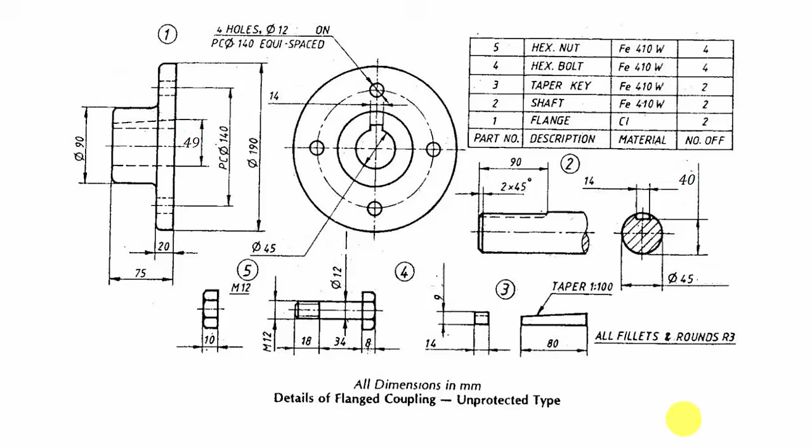In this video I am going to show you how to draw the flange coupling assembly using Solidworks. We have 5 parts: the flange, shaft, the bolt, nut and the key. So first I am going to draw the 5 parts separately, then I am going to assemble it.

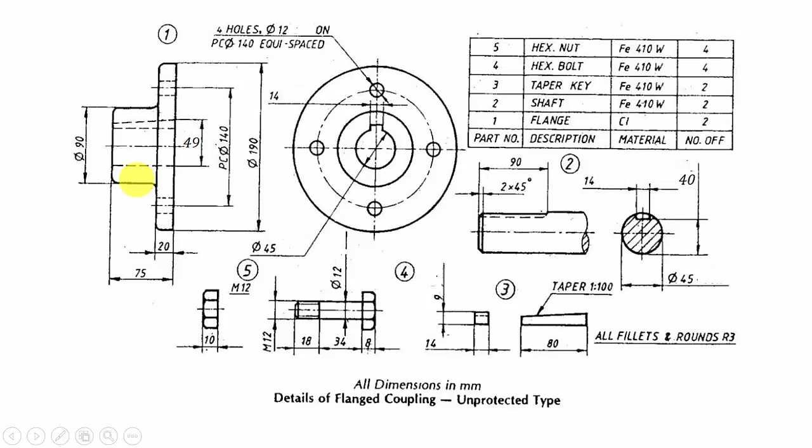First we will start with the flange. I am going to draw a circle and extrude this to a height of 20 mm. Then in that surface I am going to draw another circle of diameter 90 mm and extrude this to a height of 75 minus 20, that is 55 mm.

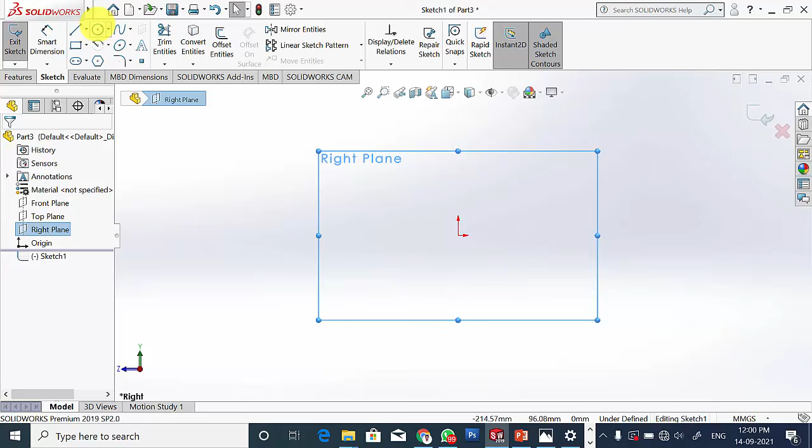First open SolidWorks, click new, click part, select the right plane, click sketch, select circle and draw a circle of diameter 190 mm. Go to features, extrude this to a height of 20 mm.

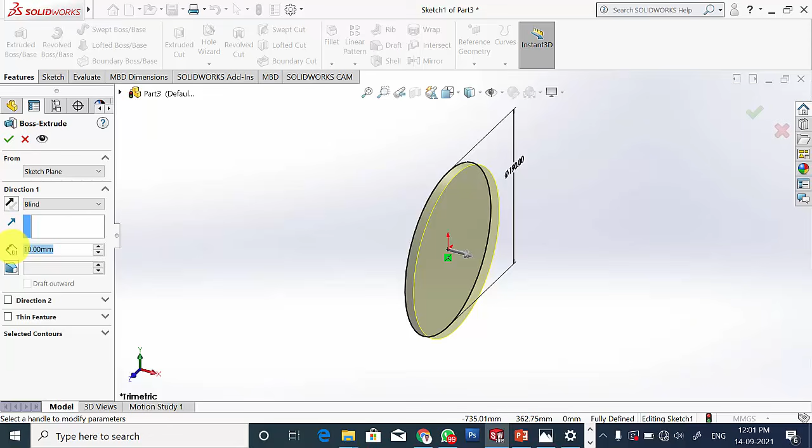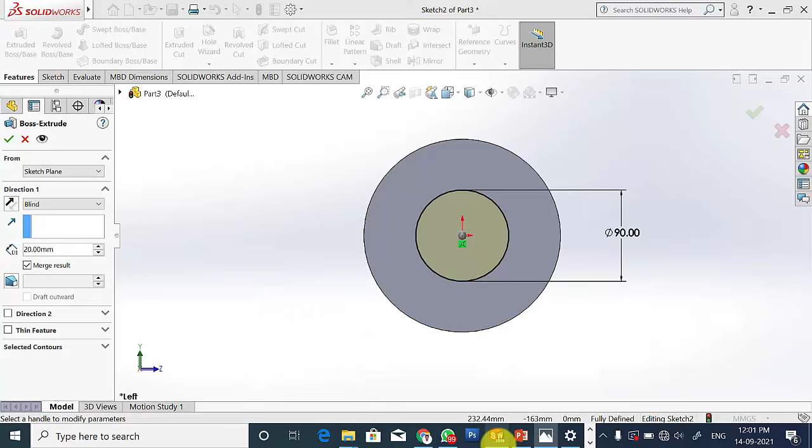Now select this surface, click sketch, click Ctrl 8 to view it in the normal direction and draw a circle of diameter 90 mm. Go to smart dimension and the diameter is 90 mm. Go to feature, extrude this to a height of, the overall height is 75 mm. So it is 75 minus 20, 55. So extrude this to a height of 55 mm.

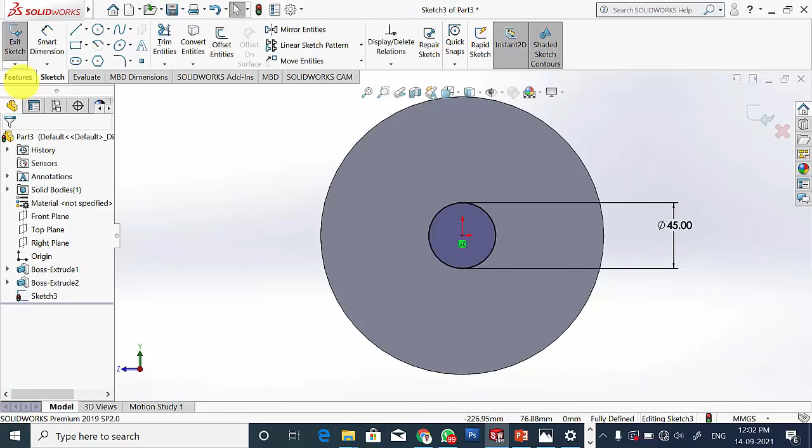In the center we have a hole of diameter 45 mm. Select the surface, click sketch, draw a circle of diameter 45 mm. Go to features, click extrude cut to remove the material. Change the blind to up to surface and select this surface so that the material will be removed up to this surface.

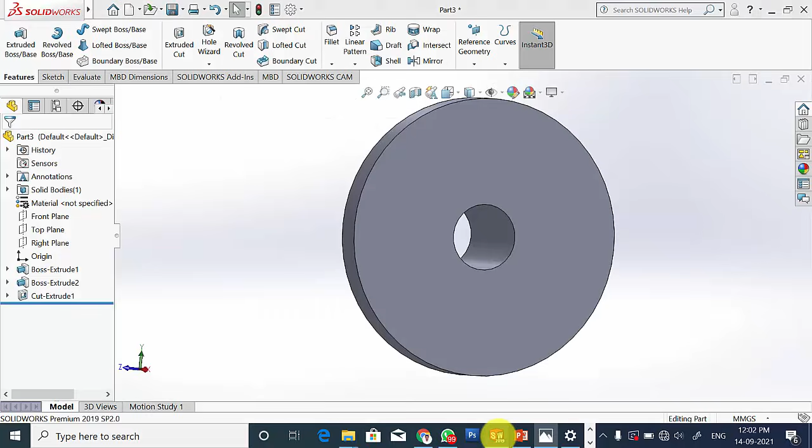Now we have 4 holes at a pitch circle diameter of 140 mm and the hole diameter is 12 mm. Select the surface, click sketch, first draw a circle of 12 mm diameter.

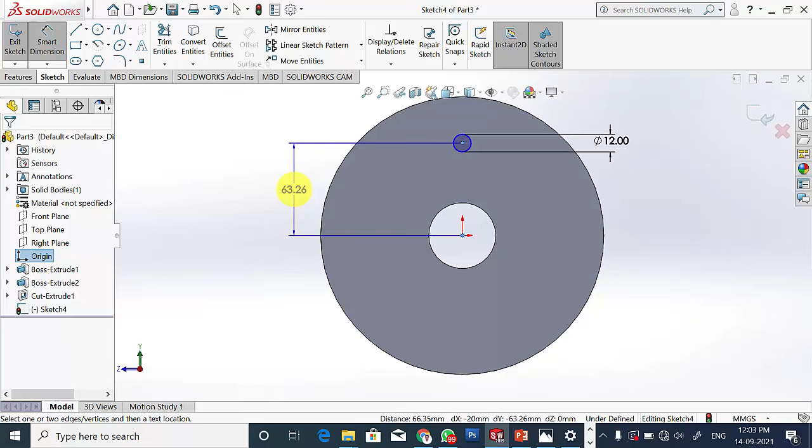So the pitch circle dimension is 140 mm. This distance is actually the radius, so it is 140 divided by 2. So locate this circle in the vertical line. Click Ctrl, click the center point and the origin and locate it in the vertical direction. Now the circle is fully constrained.

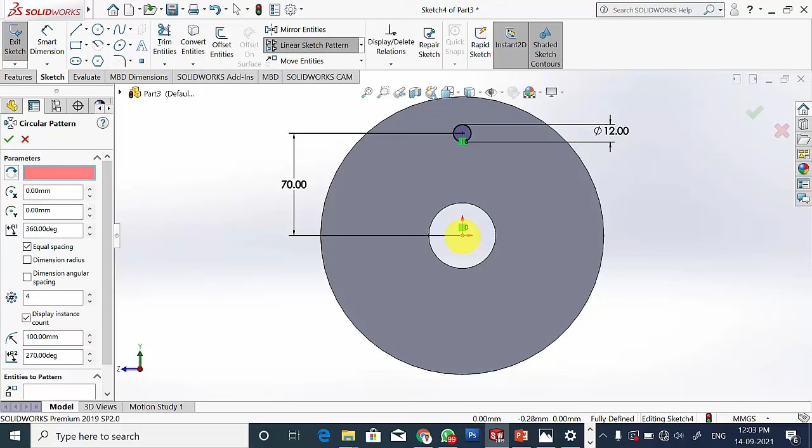Now I am going to pattern this circle. Go to circular sketch pattern. This is the point about which we have to pattern, so click the origin point and in the entities select the circle. So it is automatically 4. Click OK. Now go to feature, extrude cut, change the blind to up to surface and select this surface. Now we have removed the material.

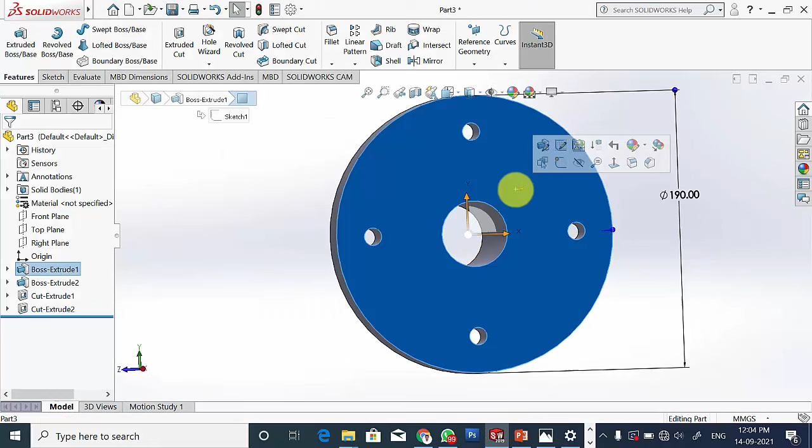Next we have to cut a key slot for an overall height of 49 mm. The diameter is 45, so the key slot height is 49 minus 45, it is 4 mm and the width is 14 mm. Select the surface, click sketch, draw a rectangle of height 4 mm and width 14 mm.

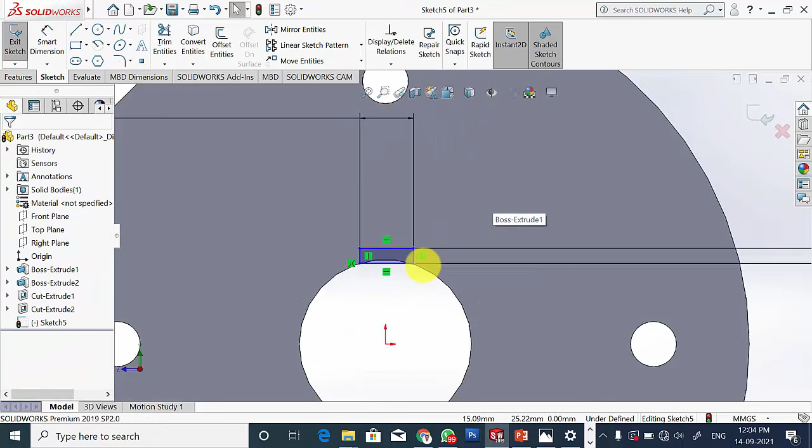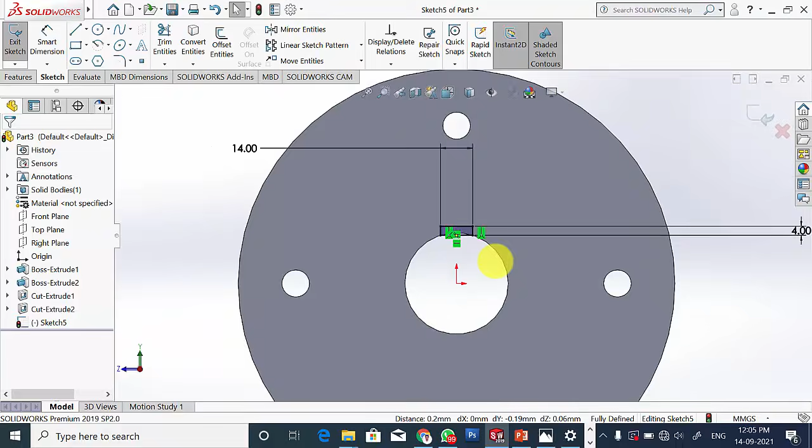This point is coincident with this circumference of the circle, but here it is not coincident. So we have to make this point lie on the circumference. Click Control, click the point and select the circle and make it as coincident. Now the rectangle is fully defined. Go to Features, Extrude Cut, change the blind to up to surface and select this surface. Click OK. Now we have removed the material.

Finally, we have to fillet the edges. All the fillets and rounds are given in a radius of 3 mm, and we have to fillet these 3 regions. Go to fillet and change the radius to 3 mm. Select the edges. Click OK. So now we have completed the flange.

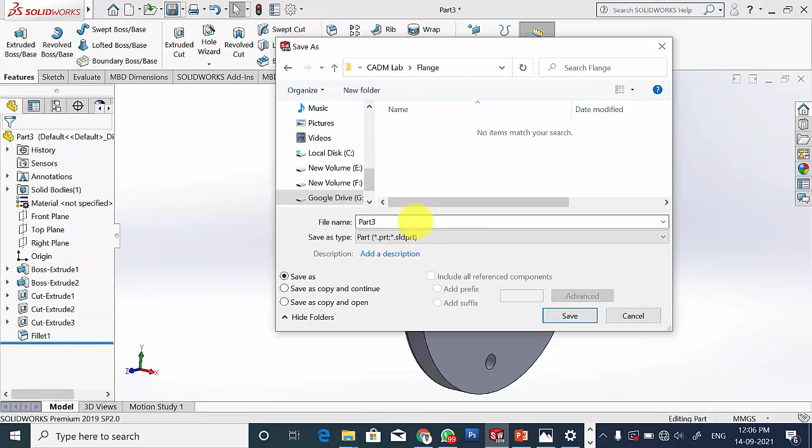Save this. Create a new folder and save it. The name is flange.

Now close this. Next I am going to draw the shaft of diameter 45 mm. Click New Part, select the front plane, draw a circle of diameter 45 mm. Here it is hatched, which means that the extrude length is not given. So roughly I am going to extrude this to a distance of 100 mm.

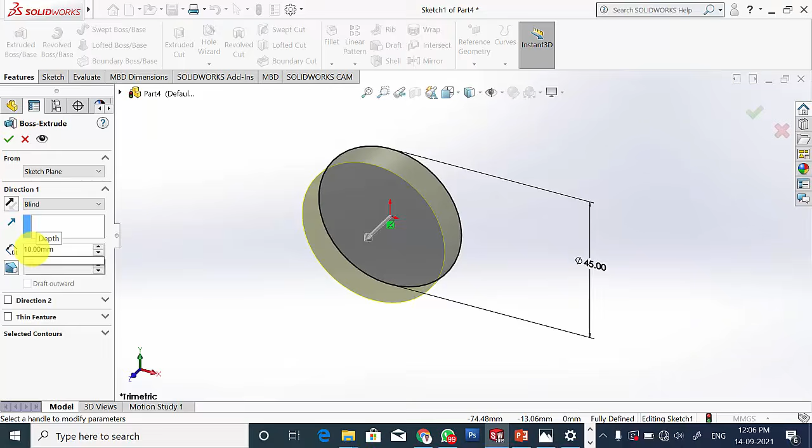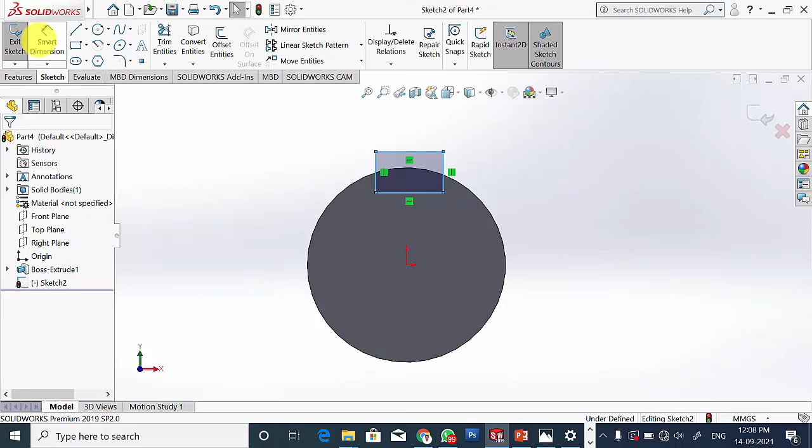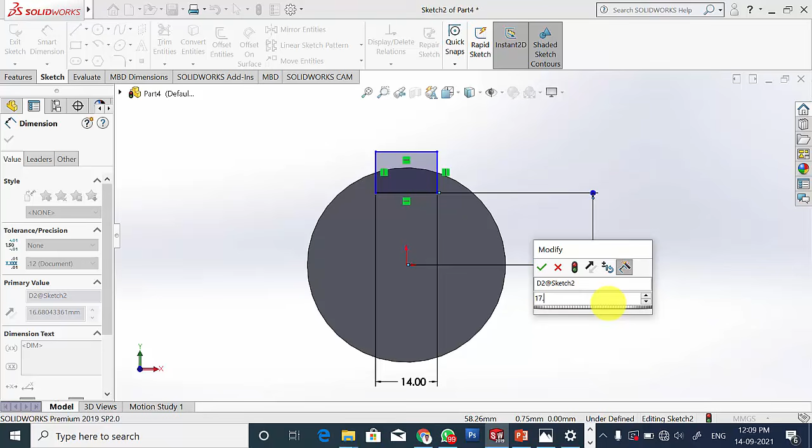Next we have to create a key slot of width 14 mm, with the remaining distance of 40 mm. So draw a rectangle of width 14 mm and the remaining height. The overall distance is 40 mm, and from the center it is 40 minus the radius, that is 45 divided by 2, so 40 minus 22.5 equals 17.5. So the height from the center is 17.5. Draw a center line and make this center line vertical.

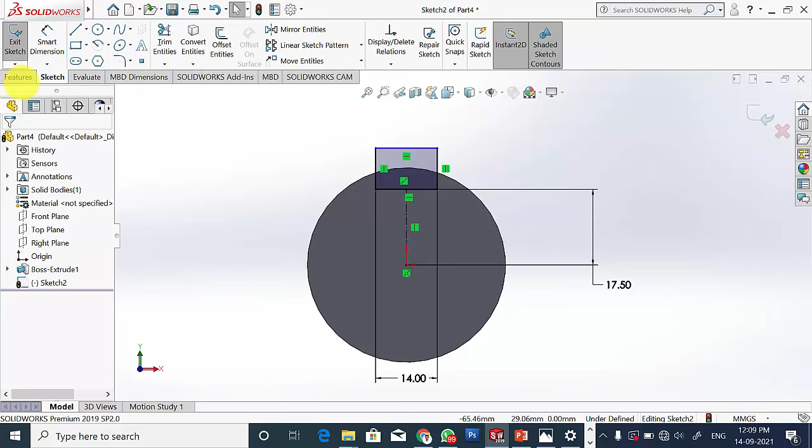Go to Features, Extrude Cut, and select the surface to the next edge of the shaft. Now we have created the key slot.

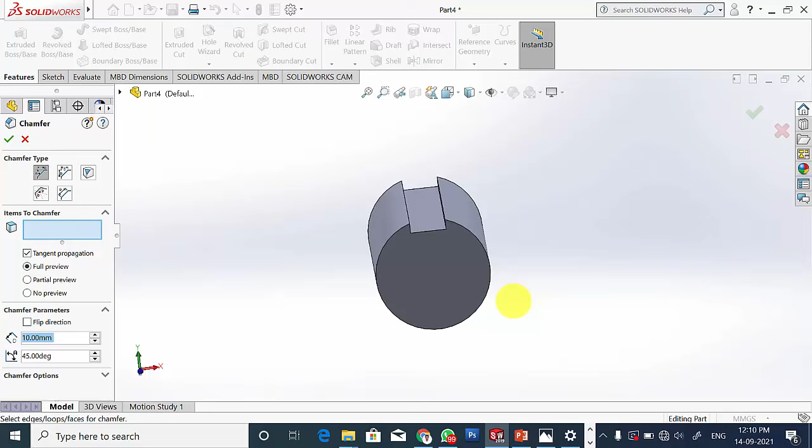Next we have to chamfer the edges to a distance of 2 at 45 degrees. Go to chamfer, set distance as 2 and angle as 45, then select this edge. Click OK.

Now save this, the file name is shaft. Close this. Next I am going to draw the taper key. Click New, a new part. The key has a rectangular cross section of width 14 mm and height 9 mm.

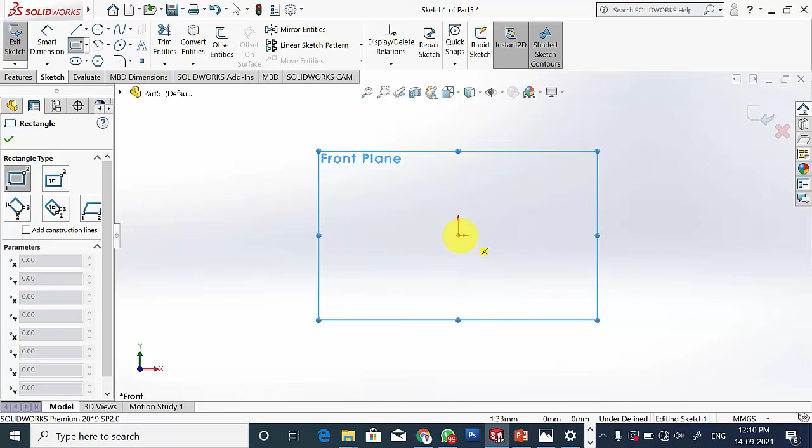Select the front plane, draw a rectangle of width 14 mm and height 9 mm.

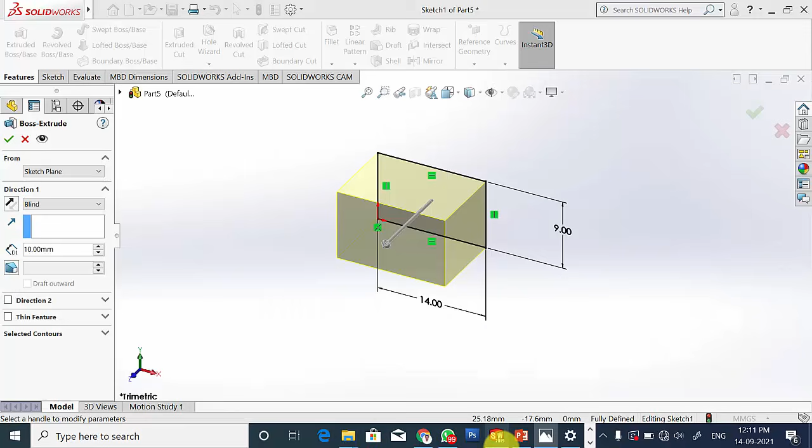Go to Features, Extrude Boss and extrude this to a distance of 80 mm, but here the taper angle is given. The taper is 1:100, meaning the angle is tan inverse of 1 divided by 100. So the length is 80 mm, the extrude length is 80 mm, and the taper angle is tan inverse of 1 by 100, which is 0.573. Click OK.

Now save this, the name is key. Now you can close this file.

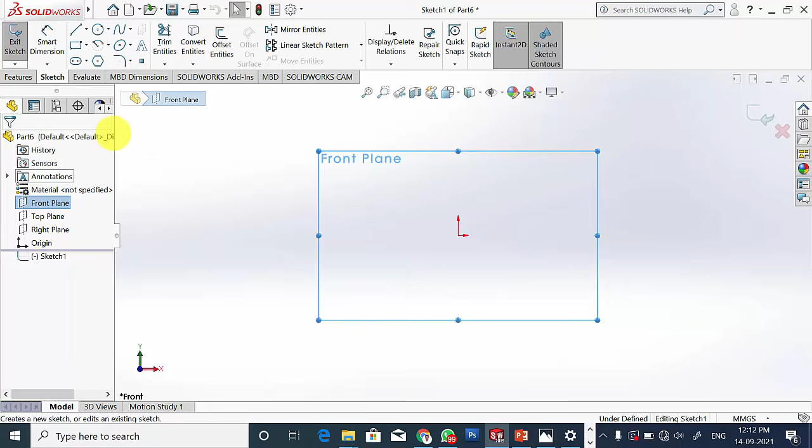Next I am going to draw the bolt. The bolt is M12 bolt. First I am going to draw this cylinder, then I am going to add a hexagon head. Click new, select the front plane, click sketch, and draw a circle of diameter 12 mm since it is M12 bolt.

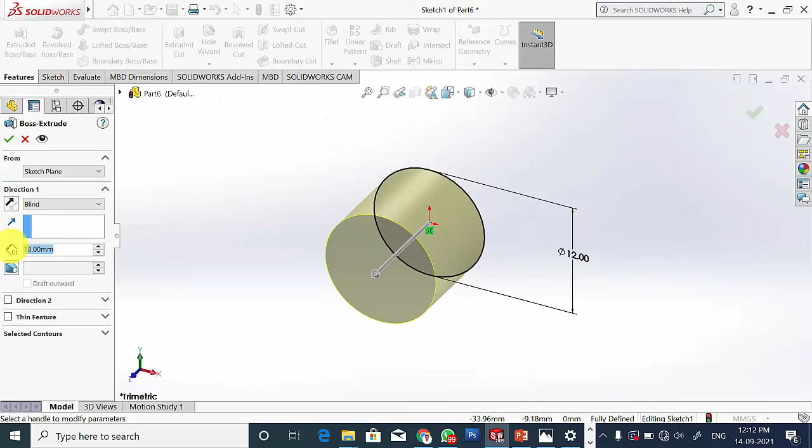Extrude this to a distance of 18 plus 34, so it is 52 mm.

Now select the surface, click sketch, and draw a hexagon. The hexagon diameter is not given, but for M12 bolt, the head diameter is 16 mm. So it is 16 mm. Click OK, go to features, extrude this to a thickness of 8 mm.

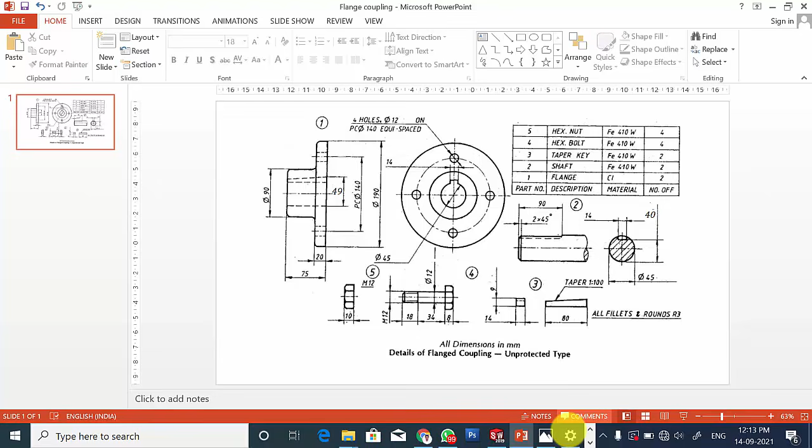Now I am going to draw the thread. The thread distance is 18 mm. To draw the thread, go to hole wizard, click thread, select the edge and select the distance as 18 mm. My thread size is M12, and for pitch I am going to select roughly 1.5.

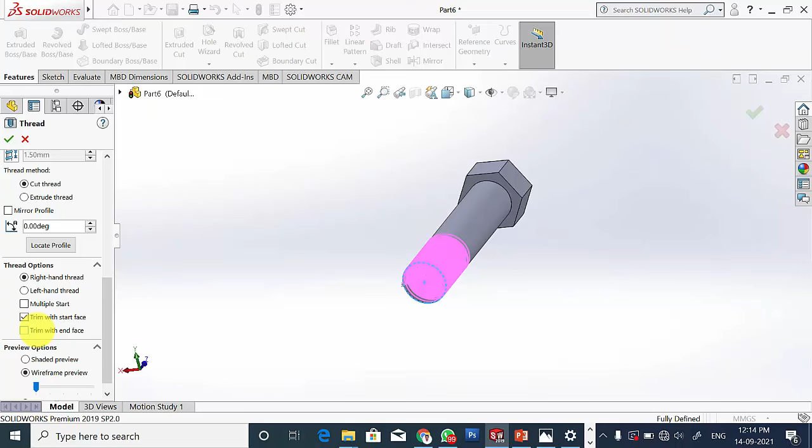So trim with the start face and trim with the end face. Click OK, now I have created the thread. Now save this, the name is bolt.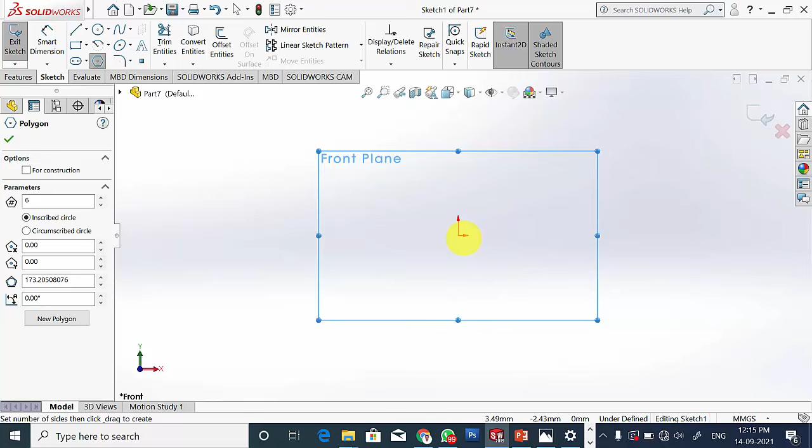Close the sketch. Finally I am going to draw the nut. Create a new part. The nut diameter is same as the head diameter, so we have created a head diameter of 16 mm. I am going to create the nut diameter as 16 mm and the inside hole of diameter 12 mm since the bolt size is M12.

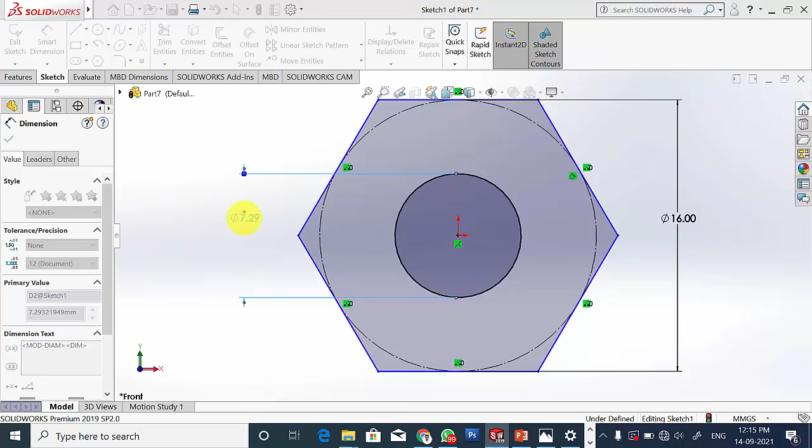Before that, this hexagon is not fully defined. So select the point, select the center point and make it horizontal. Now it is fully defined. Go to features, extrude boss and extrude this to a thickness of 10 mm.

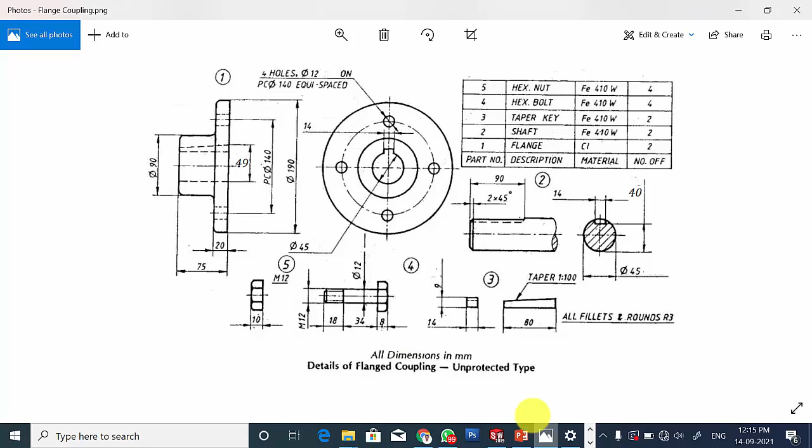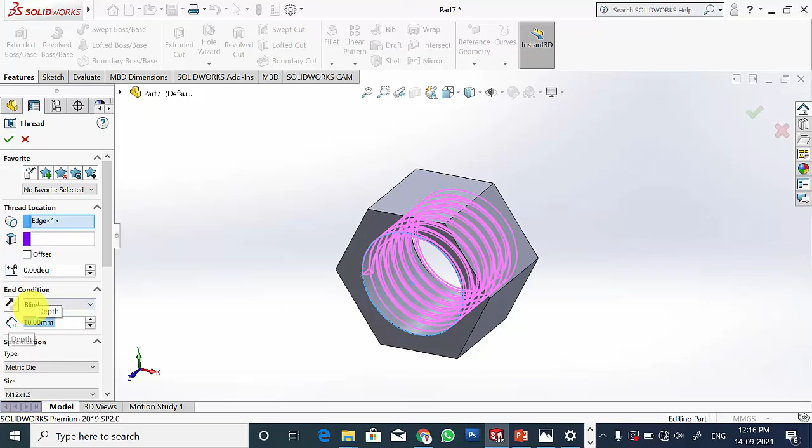Now I am going to create the internal thread. Go to hole wizard, thread, select the edge, and the thickness is 10 mm, or otherwise you can select up to selection and select the surface.

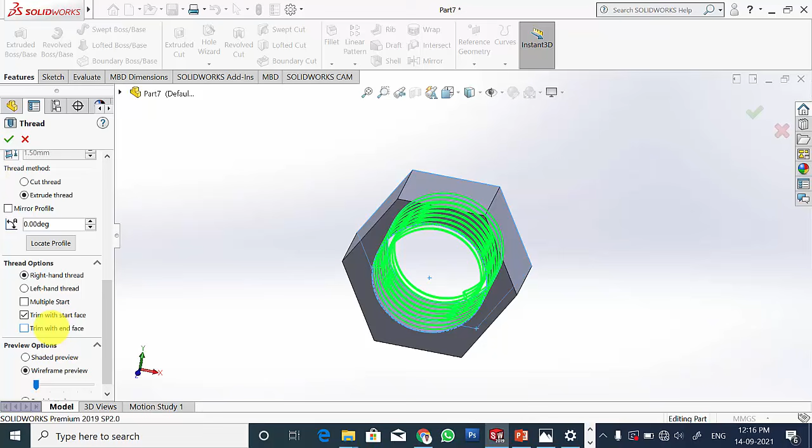So it is M12 into 1.5. Here we have to click extrude thread - for bolt it is cut thread, for nut it is extrude thread. Select trim the start face and trim with the end face. Now I have created the internal thread. Save this as nut.

Now we have created all the parts. Now I am going to assemble this. Select assembly, create a new file. First I am going to insert the flange.

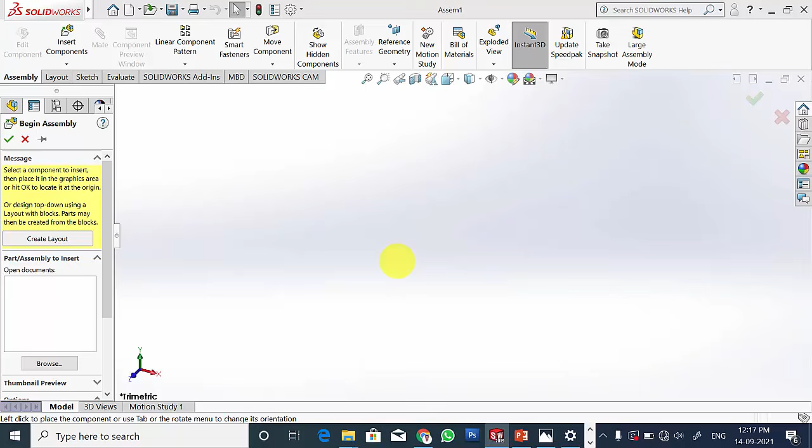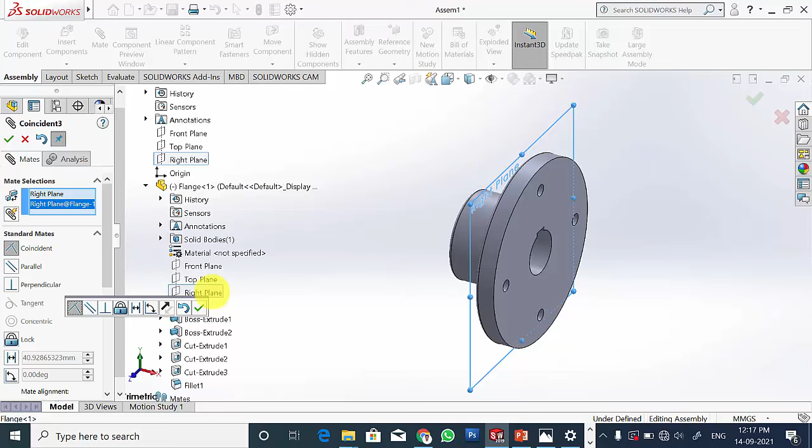So the first step is click float and mate the planes of the assembly with the planes of the first part. Mate the top with the top, and the right plane of the assembly with the right plane of the flange.

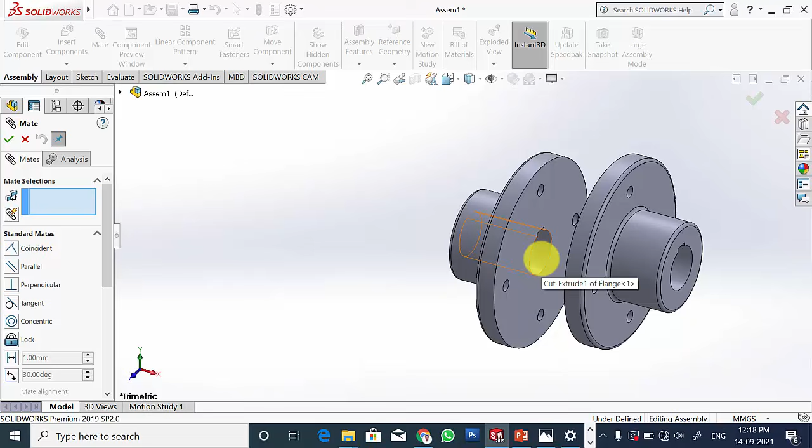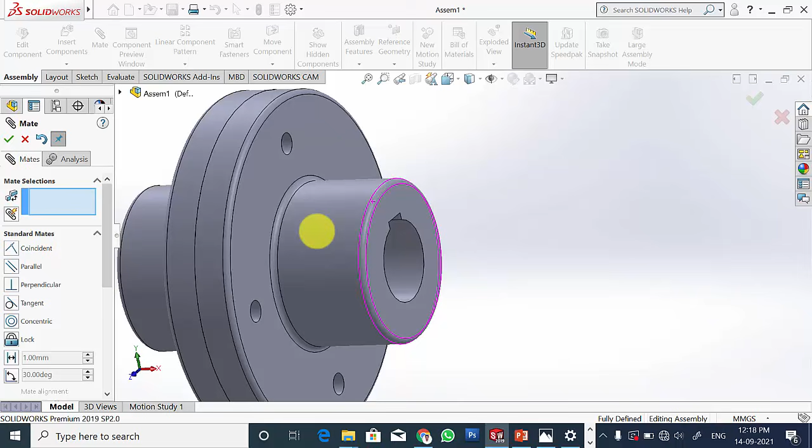Now click insert components, open flange, rotate this about the y-axis. Click mate and select the two inner surfaces and make it concentric. Select these two edges and make it coincide. Then select mate and select these two surfaces and select coincide. Now you cannot move this flange, meaning it is fully defined.

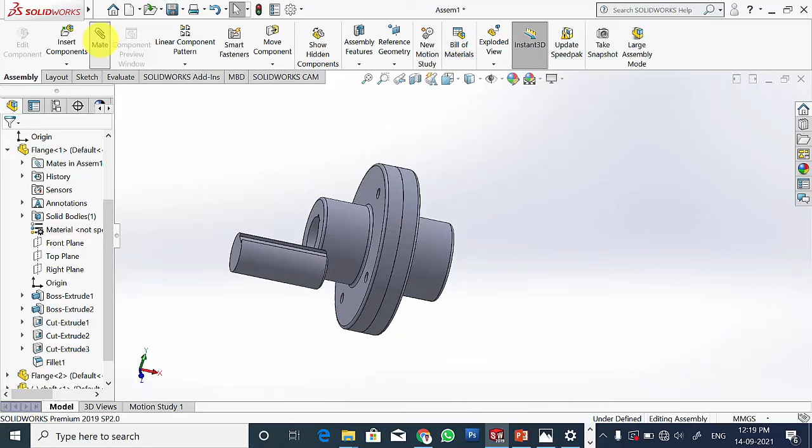Now go to insert component, insert the shaft. Rotate this about y-axis. Go to mate, select the inner dia of the flange and outer dia of the shaft, and select these two edges.

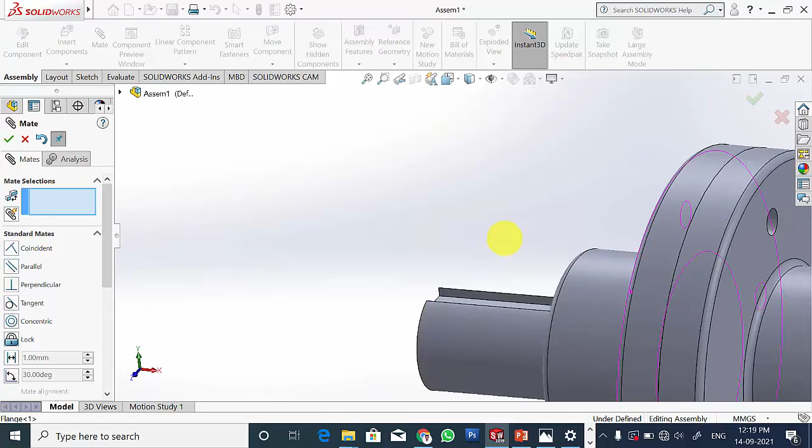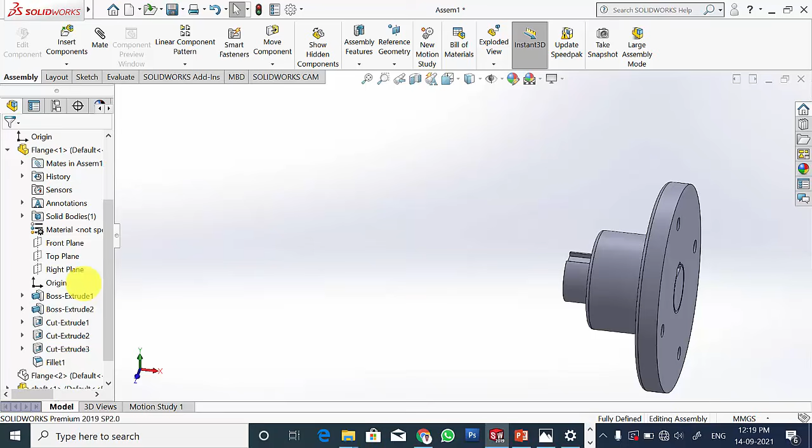So to assemble this effectively, I am going to hide this component. Select this component and click hide. Now go to mate and select these two surfaces. Click OK. Now to view the next flange, you can see here this is flange number 2.

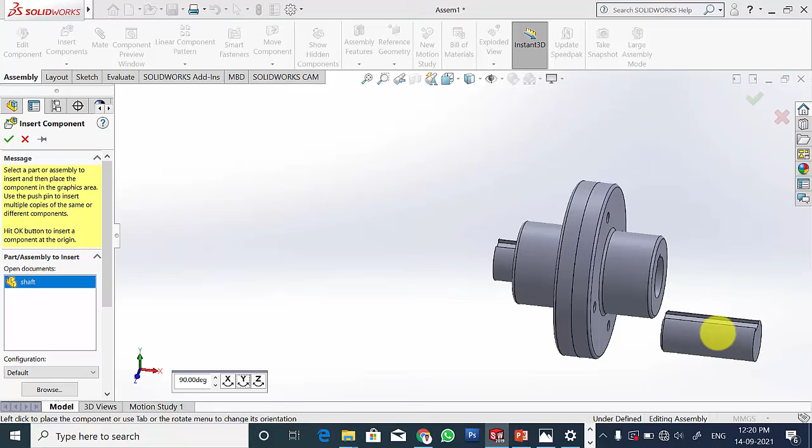Right click on that and select show components. Now insert the shaft again. Rotate this about y-axis. Click mate, select the inner dia of the flange and outer dia of the shaft, and select concentric. Now select the two edges of the key slot.

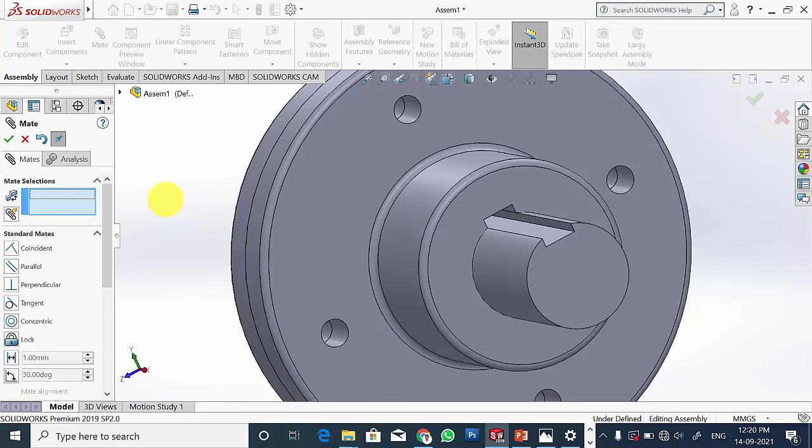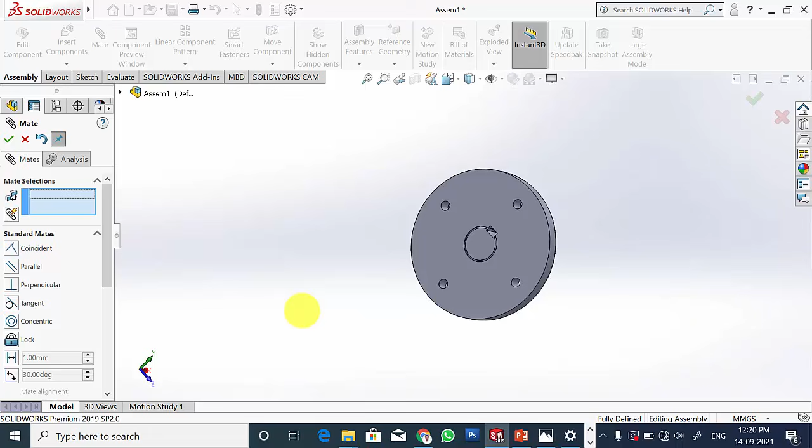Then to insert this, I am going to hide the second flange, that is the first flange. So hide this, then if you want, you can hide the shaft also. Now go to mate, select these two edges and make it coincide. Click OK. Now you can view the shaft and the flange.

Now insert the bolt, rotate this about the y-axis. Click mate, select the inner dia of the bolt hole and the bolt, so here you have to lock the rotation. Click OK.

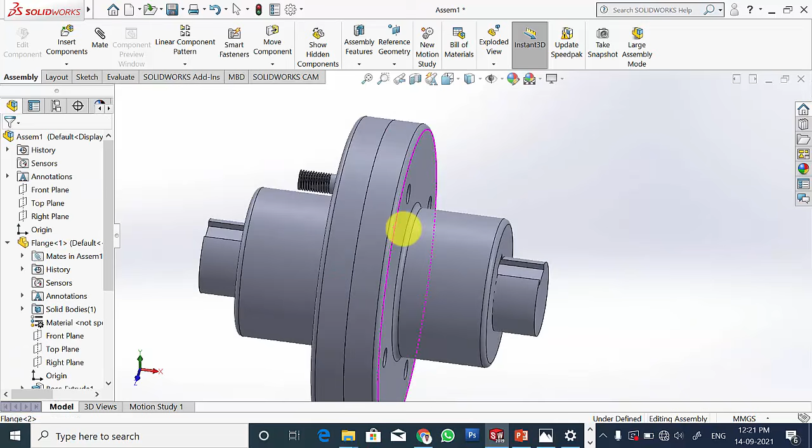So here the bolt head is inside the flange, so you can click the bolt and move this. Now go to mate, select the surface and the flange surface. Now it is fixed with the flange surface. Click OK.

Now we can pattern this. Go to linear component pattern, select circular component pattern, and select the components to pattern, and select any one of the diameter. So here I have selected this diameter. The angle between the components is 90 degrees and I want to pattern 4 components. Click OK. Now we have patterned this.

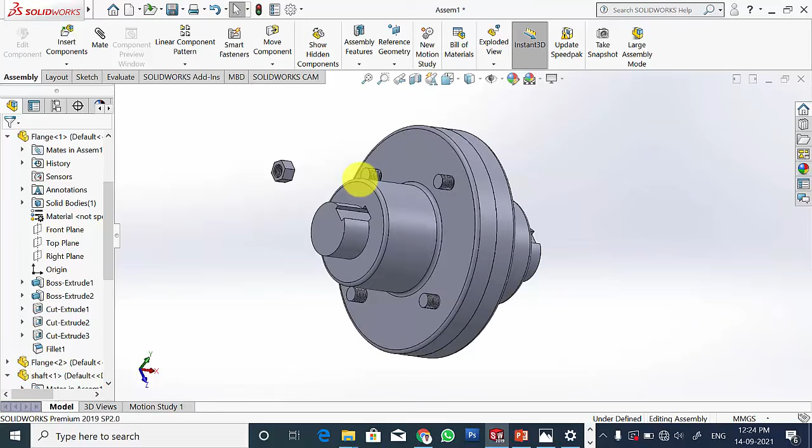So now I am going to insert the nut, select mate. Click the tree, select the bolt and nut, and assemble the top plane of the bolt with the top plane of the nut. Then assemble the right plane of the bolt with the right plane of the nut. The nut assembly is very important.

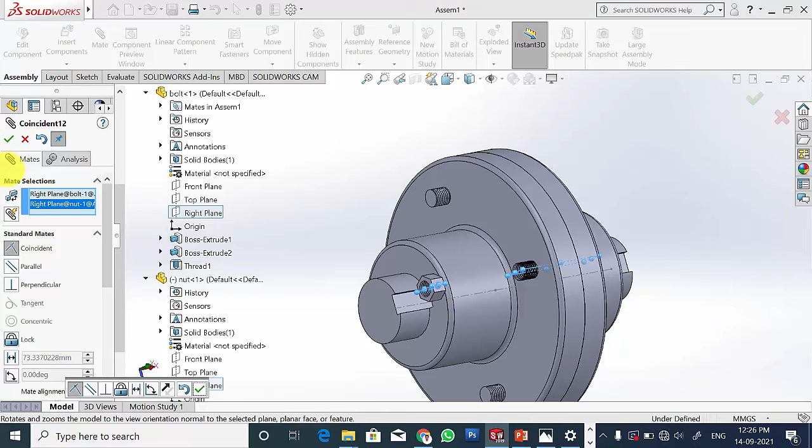Further, select the surface and select the nut surface and click coincide. Here we cannot directly select the surface and mate, so we have to select the plane and mate this nut.

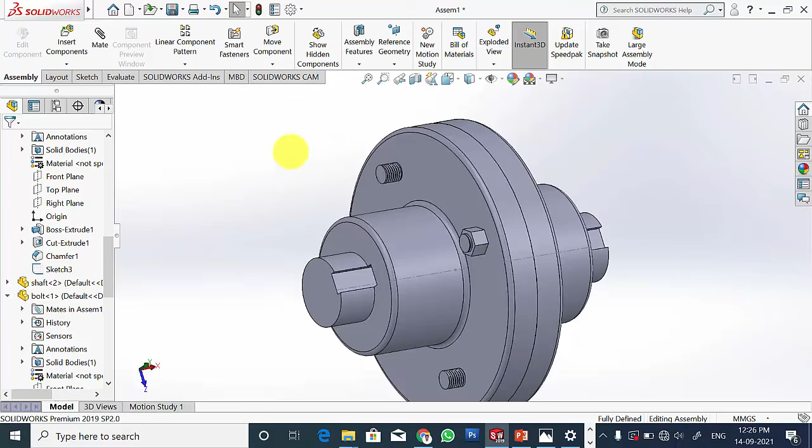Next I am going to pattern this. Select circular component pattern, select the components to pattern and the direction, select any one of the diameter. The angle is 90 degrees and we have to pattern 4. Click OK.

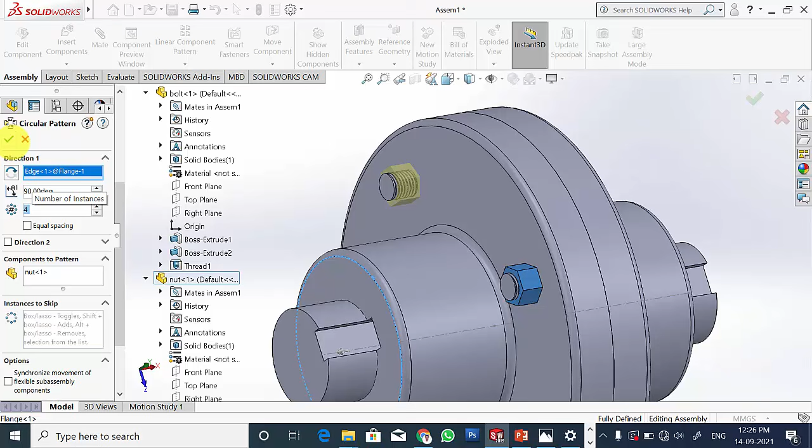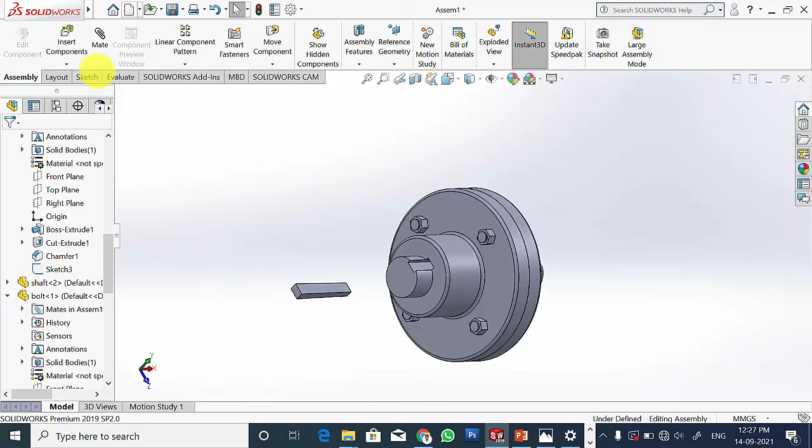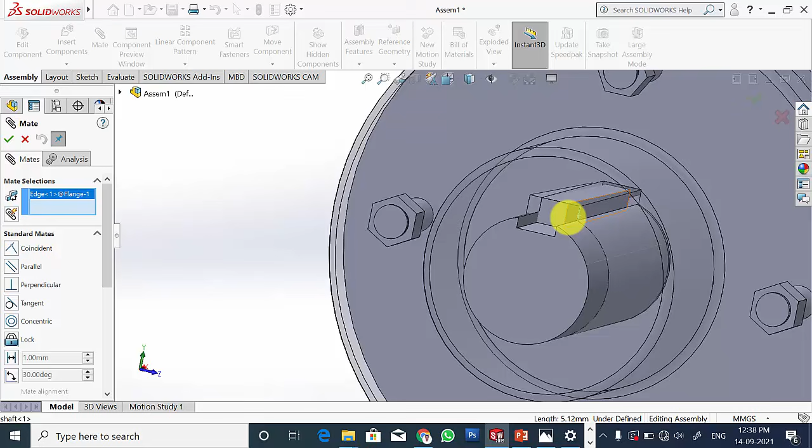Finally I am going to insert the key. Rotate this about Y axis. Select mate, click the two bottom surfaces. Further, you cannot mate these two edges, so select this line and the surface and make it coincident. Similarly, select this edge and the surface of the key and make it coincide.

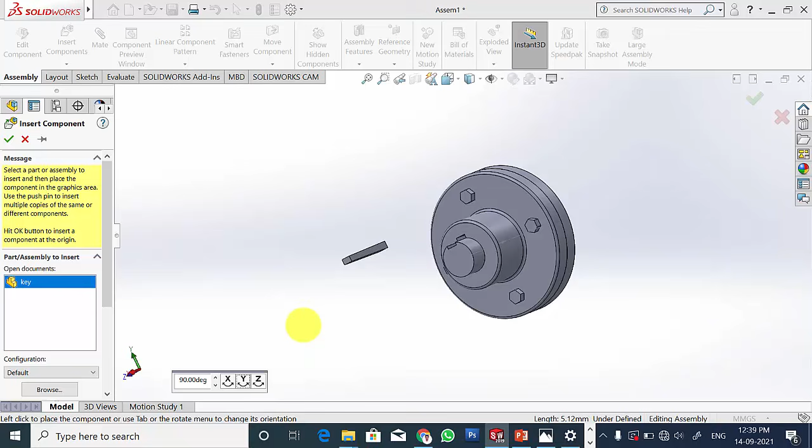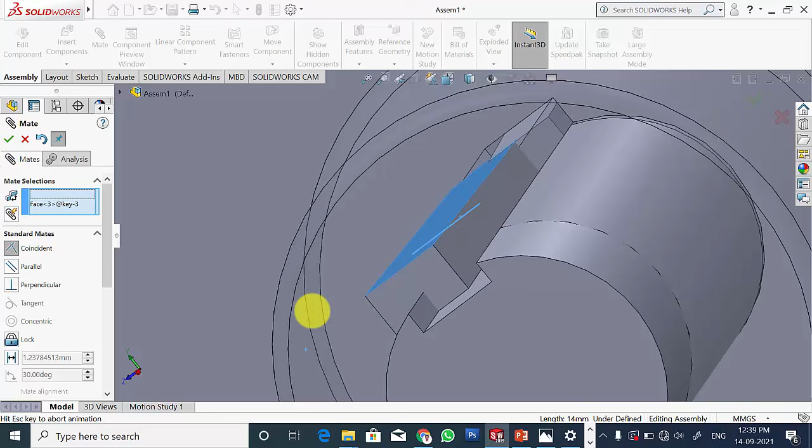Then insert the key again. Rotate this about Y axis. Select mate, select these two edges and click coincident. Then select this top edge and the surface and click coincident. Similarly, select the side edge and the surface and make it coincident.

Now this is the assembly of a flange coupling.